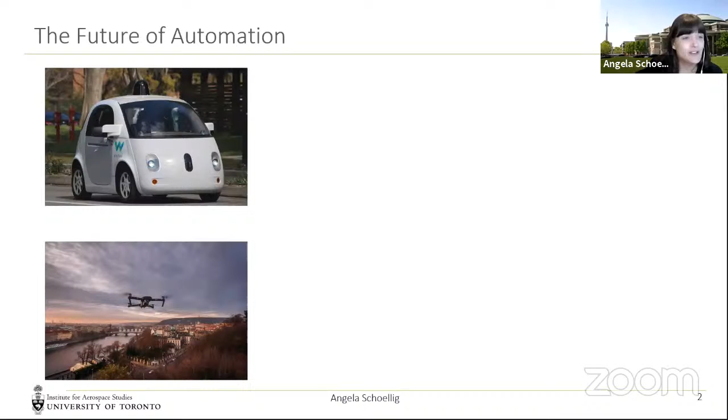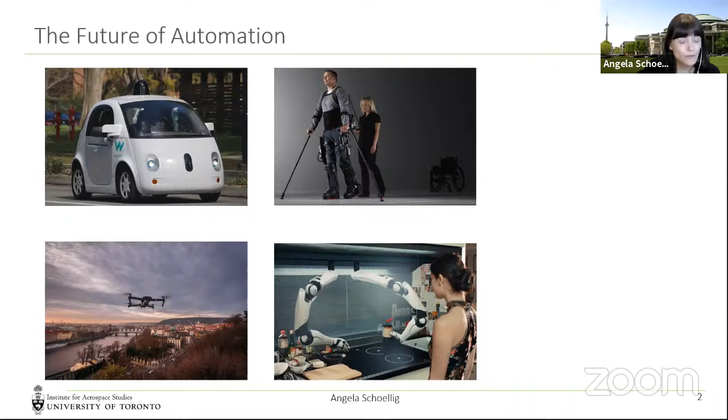So we envision a future where robots navigate on our roads and in our skies, where they support us in our daily tasks, such as in the kitchen, or supporting handicapped people to walk. And we also envision robots to collaborate with us at the workplace.

What all these examples have in common is that there are large prior uncertainties that are very difficult to predict ahead of time. On the road, that could mean the weather conditions, or in the sky, that can mean different wind conditions. In collaborative tasks with humans, that may mean different preferences and characteristics of different people. But nevertheless, the robot has to actively make decisions, and we expect safe and high performance behavior.

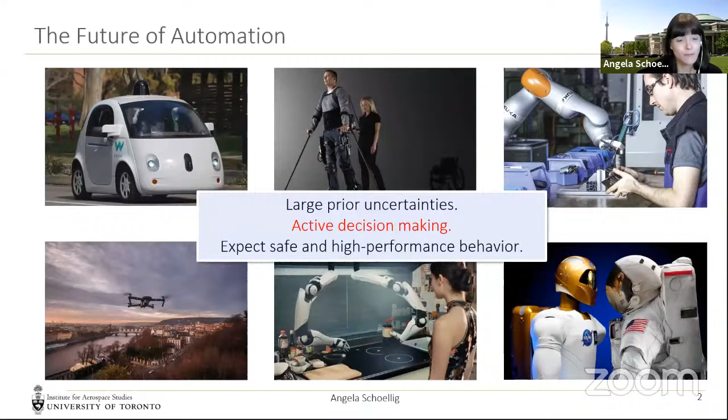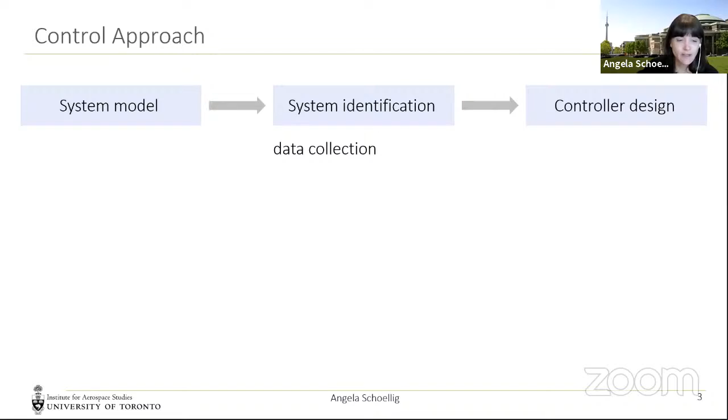Typically, how such a problem of decision making was solved by the controls community is in the following way. We would establish a system model, usually a differential equation that describes the motion of the robot in the given environment. Then we would do some system identification, which may involve some data collection, identifying certain inertia parameters of the robot. And once we have this full model, then we would design a controller that makes decisions at every moment in time. This works really well in controlled environments, such as these robots on the assembly line.

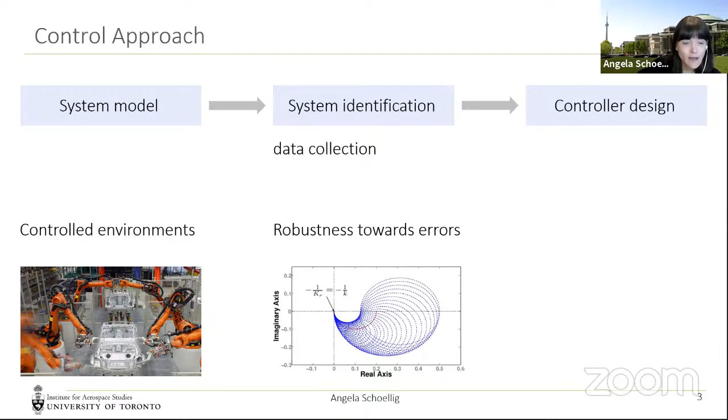We can also study how robust this approach is towards model errors, or errors in the environment that we didn't consider, and up to which point it works and when it doesn't. And we can incorporate safety constraints in formulations such as model predictive control. So we can explicitly say the robot needs to stay on the road, and we want to apply actions to the robot that guarantee the robot stays on the road. These guarantees are satisfied under the assumption that our model is correct.

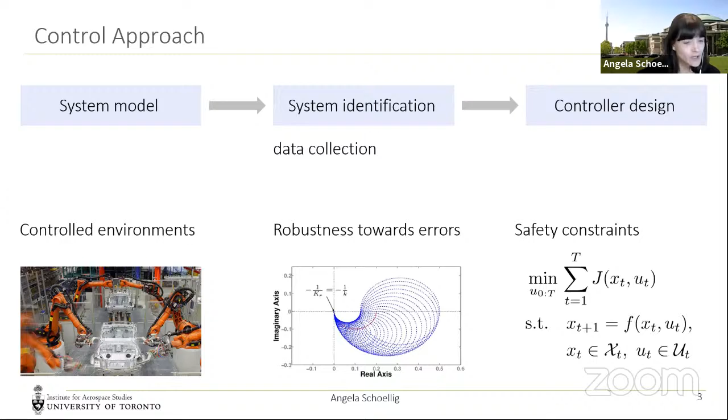So the advantages of this approach are: we have models that really describe the behavior, we can use these models for feedback, we can guarantee safety, and we can study the worst case scenario—up to which point does our controller work, up to which point of model error. But what it doesn't consider is that the worst case behavior is not always the best.

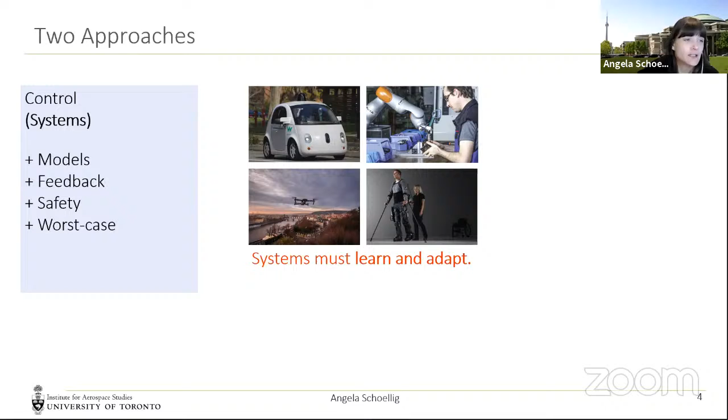So if I have a robot that should drive on the road, and I have various road conditions, the best thing a standard control approach could do is try to model this, try to model the full range of possible road conditions, and then design one controller that guarantees safe behavior for the robot. Overall, learning and incorporating data is not really considered. Everything relies on a priori knowledge.

So a priori, if I would specify the different road conditions that a robot could experience, and then based on that try to find a controller that makes safe decisions despite a variety of road conditions I could experience—there are, of course, adaptive controllers in the controls community, but generally the controls community is not good at leveraging historic data and learning, possibly even offline, from historic data and improving the system.

So the performance here is usually limited by the system understanding. Typically this means either I have model errors, or I'm very conservative because I assume I can experience a large range of different conditions, for example different road conditions. And then to find a controller that works for all of them, the controller is quite conservative—so I would basically drive as if it's winter even on a summer day, just because that's the safest I can do overall.

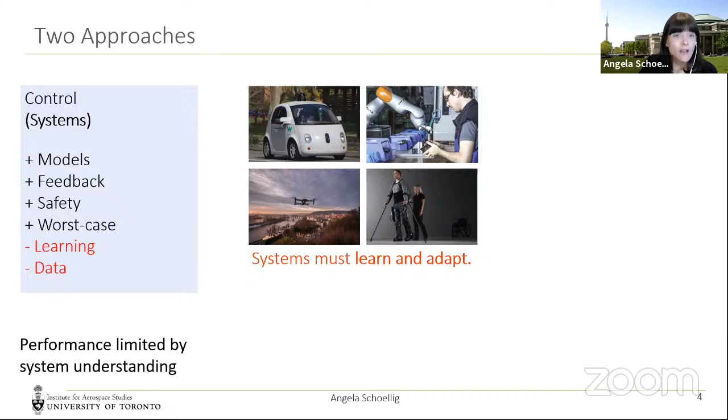Then there's the field of reinforcement learning and machine learning. Typically, I just try to broadly categorize, so don't be offended if you do reinforcement learning with models. Typically, reinforcement learning would not use a system model, completely rely on data samples, and then optimize the controller through exploring actions in the real world.

So it looks like this: I have a learner or controller. It applies actions to the robot. It observes the state and also the reward, which is related to the performance on a given task. And then it optimizes the actions over time, learning control actions based on the state.

So what is good about this? It learns relevant data for a specific task, which is defined through the reward. The performance is typically in expectation, so it does not compare to the robust control approach, where it tries to find a controller that works for any possible condition, for example any possible road condition. Usually performance here is defined in terms of expectation, at least in the more traditional works.

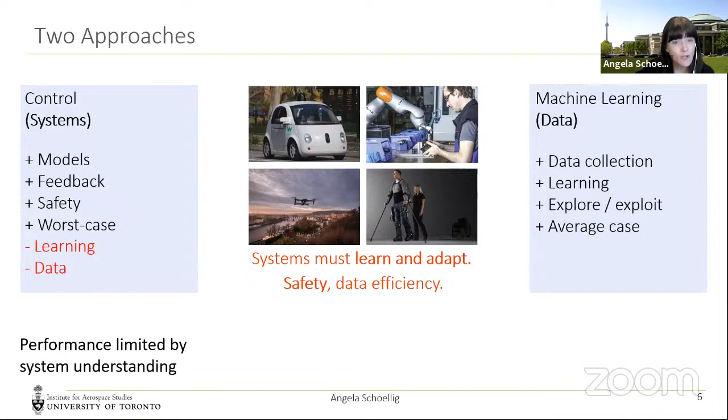That's why a lot of the examples are in simulation or simple robot cases. So it does not guarantee safety and doesn't make any kind of guarantees for the worst case. Here the safety is kind of limited by the lack of overall understanding of how reinforcement learning works.

So the idea is, can we combine the two things? Can we combine models and data to achieve systems that learn and adapt, but at the same time are safe and data efficient?

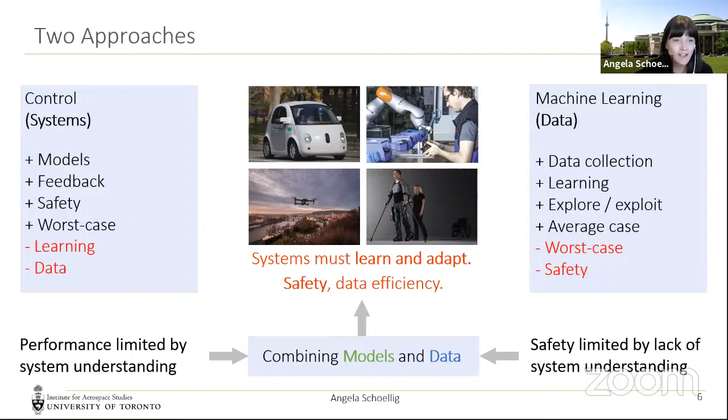To aim for these applications in the pictures, where robots directly interact with people, where we don't want to show a robot 10,000 times what to do in our kitchen till it knows it. So data efficiency is important, and safety.

So what we've done in our research is to achieve performance and safety for robotics applications with prior uncertainties by combining machine learning, which is really the science of data and inference, with control theory. Control theory for a long time has studied feedback and automation, and has come up with concepts that describe the performance of these closed loop systems that make decisions, and then the decision affects the next state, and that state affects the next decision.

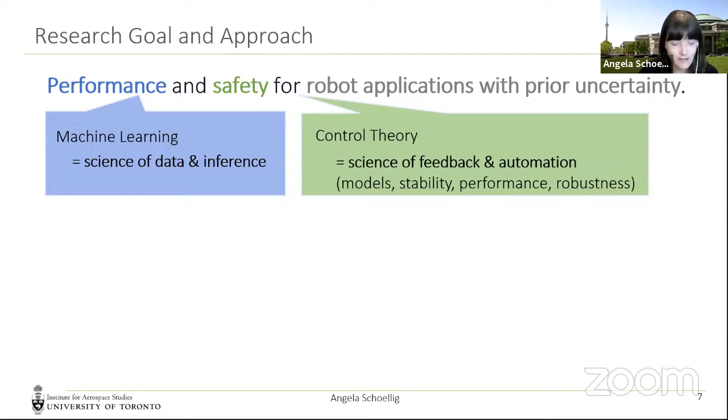So we have worked in my lab with lots of real robots, and that also motivates some of the approaches that we have been developing. Here you just see a range of robots, going from different flying platforms to self-driving vehicles, and more recently these kind of mobile manipulation platforms that could be used in home environments, but also warehouses.

A particular focus of our research was on online learning. How can we learn, can the robot improve as it moves in the environment? And yeah, real robot experiments.

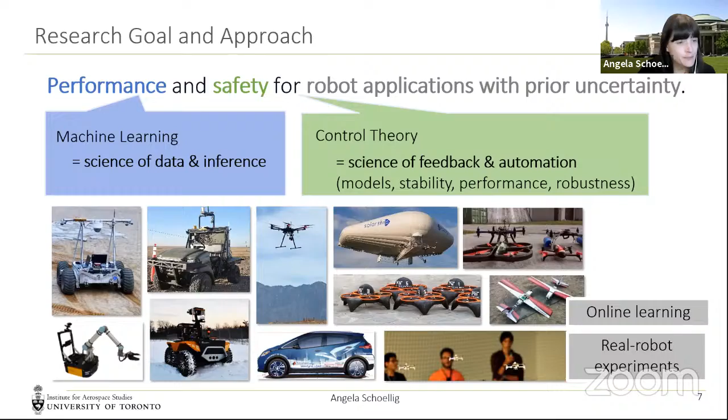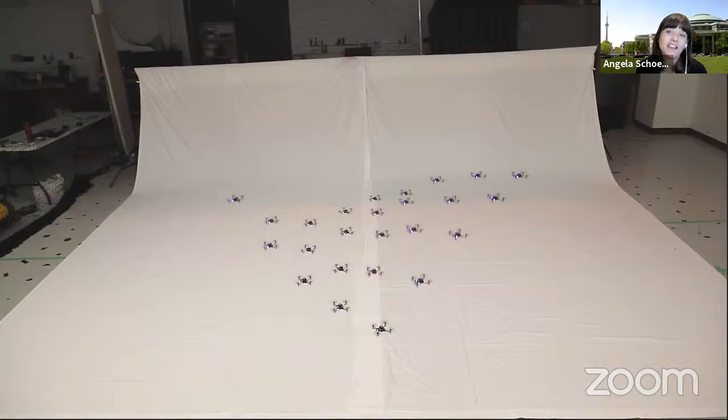So when you come to our lab, you actually see robots moving all the time, even now, despite the pandemic. So this video just summarizes, gives you a quick glimpse into the type of robots we work with and how they look. This is a swarm of robots, and here we need obviously accurate motion.

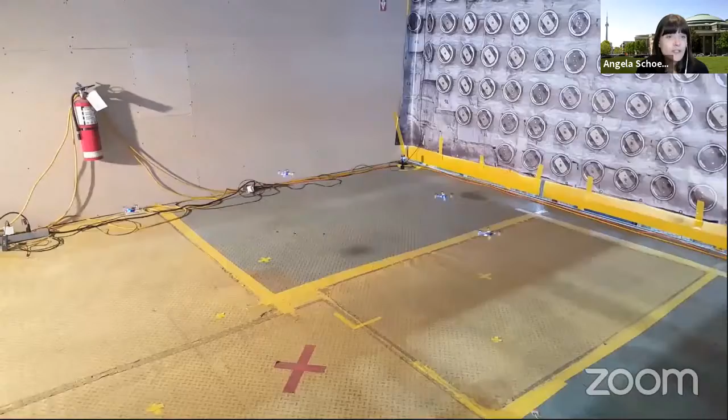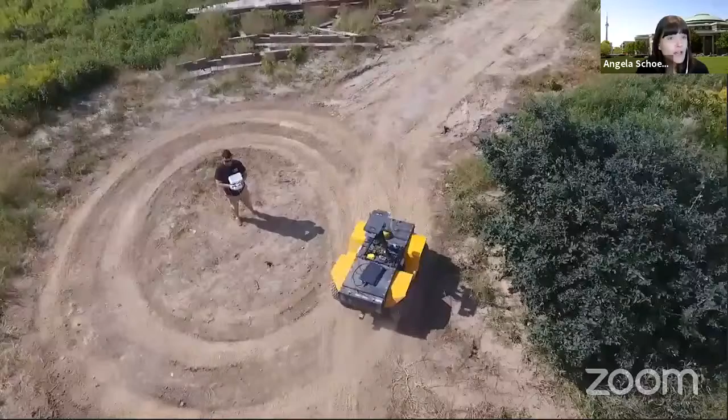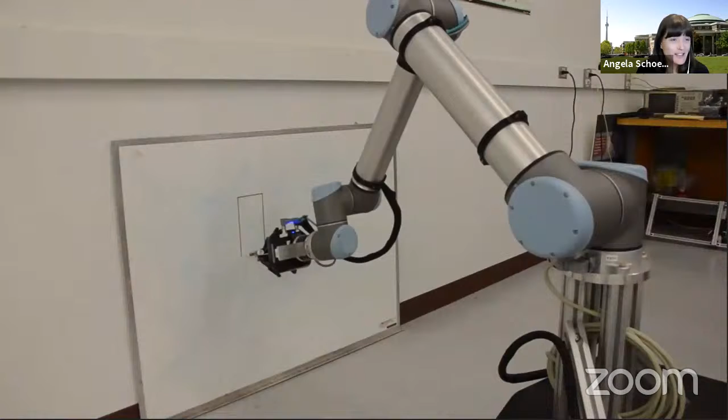This is an off-road vehicle that we have been using for some of our research. And for the last 3 years, we have been participating in a self-driving car competition sponsored by General Motors, where things have to work at competition time and day. And here you see the mobile manipulator.

So hopefully this gives you an idea where we are coming from, and which type of systems we want to work with and improve over time.

And this I'd like to briefly show. This is kind of the bigger picture of how I map our research, but also, I guess, generally the progress in robotics. On the one hand, on this vertical axis, we aim to build robots that can do more and more complex tasks. You know, industrial robots can do single, very predefined tasks, but eventually we want to go to interactive human-centered tasks. So the task complexity plays a role, but also the complexity of the system and the operating conditions here on the x-axis.

A system is less complex if we have sufficient prior information to control it, so we don't even need learning. And if the environment is partially unknown and changing, that makes it more and more complicated. So I can put some examples here, from industrial robots to self-driving to your home robot.

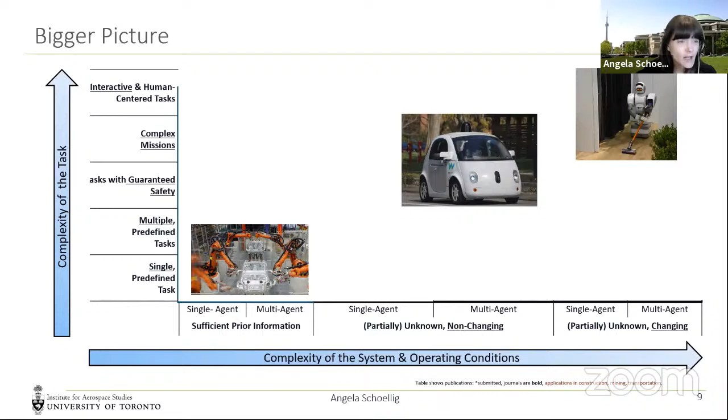So the first part, when we have sufficient prior information, we can use model-based planning and control, and we don't need any learning because we have all the prior models that we need to do this task.

Just because I assume that there are multiple people here that have more machine learning background, I want to give you the quick summary of control theory. Feedback control is something that was studied since the 1870s.

So since the first machines were developed. And the idea is really that you have a robot, you measure certain quantities, and you feed them back into the controller. The controller has also access to the desired reference signal, and this controller computes the input to the system, or to the robot. And ideally, the output follows your desired reference signal.

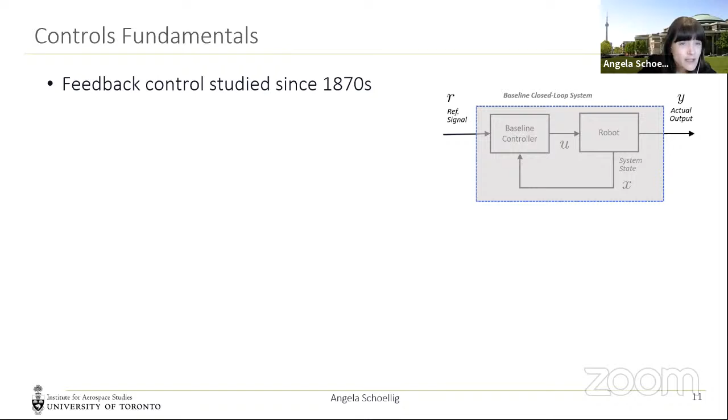So that's kind of a baseline control loop, and the controller is usually designed based on knowledge about the system. This kind of control theory focuses on dynamic systems and continuous states and actions. It assumes an accurate class of models, and then it can give you closed loop performance guarantees.

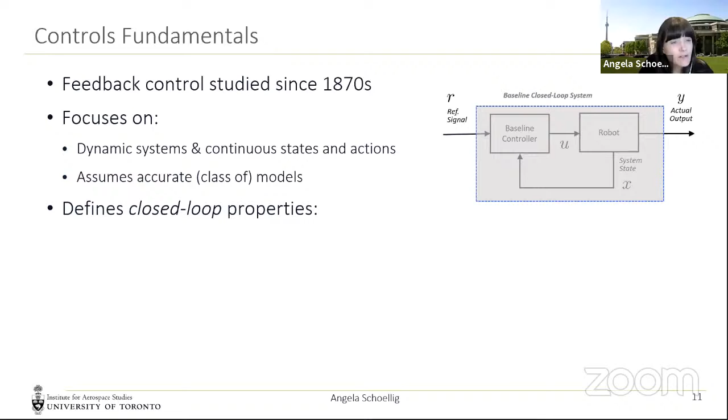And that's, I think, something that can be very interesting for machine learning researchers as you continue using your machine learning techniques in robotic systems. They're kind of in a closed loop. And so control theory has always studied stability.

So if I have a bounded input, can I always guarantee a bounded output? So for a flying vehicle, this means, will I stay in the air and not crash, despite maybe some perception errors, some controller errors? Can I be stable?

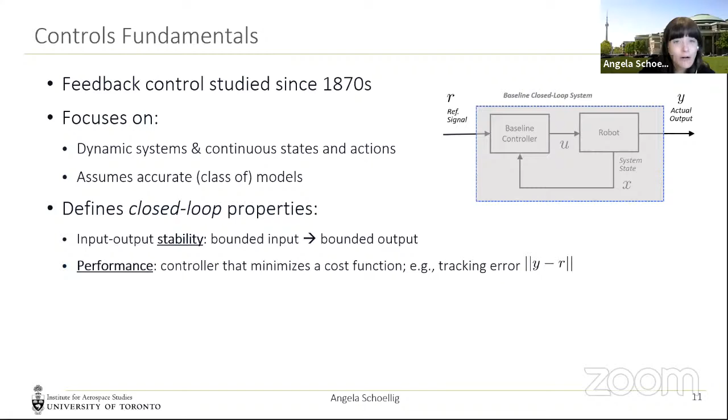They have also looked at the performance of this closed loop control system, like, for example, how close is my output tracking my reference signal? And they can derive formal results for this.

And in control theory, robustness is a big topic. So robustness generally means stability and performance in the presence of bounded modeling errors. And so it basically gives you worst case guarantees. I bound my errors in my model, or generally my errors in the closed loop system. And I say, if I have these bounded errors, my system still performs at a reasonable level of performance, and it doesn't become unstable. So the car doesn't drive off the road, the flying vehicle doesn't crash.

And then finally, they can also give formal guarantees for constraint satisfaction under the assumption that a model class is known, and under this assumption, for example, that these errors that we have in the closed loop are bounded.

So what I want to say with this slide is, in control theory, the closed loop properties and characteristics have been studied, but under very simplifying assumptions usually. The biggest simplifying assumption is that we have accurate models and accurate bounds for the errors. But then, they could study and guarantee things like constraint satisfaction, robustness, and certain levels of performance.

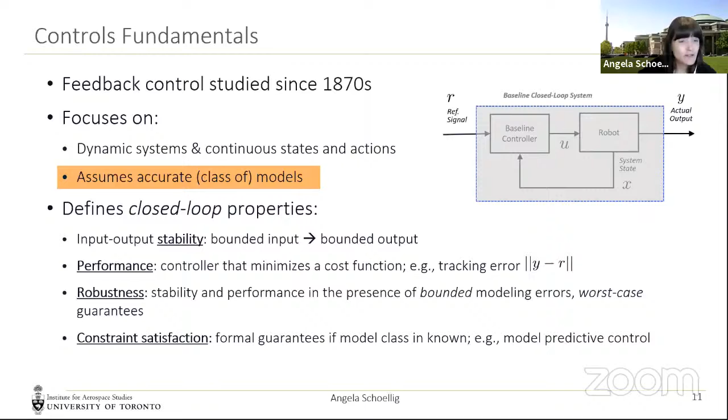So how do we go from the traditional control theory to these more interesting application areas? My story, my promise, is that we need machine learning because we have limited information, or we don't have all the information ahead of time. So in the talk, I want to show you some of the things we have been doing to combine control theory and machine learning.

I want to show you how we started with a single robot learning a single task. We allowed it a training phase with some unknown but static conditions, and how we extended this to a multi-robot framework learning multiple tasks. The robots continuously improve as they operate in the real world, and they can deal with changing conditions.

Let's see. The first step was a single task, and we allow a training phase. The example you can envision is flying a slalom with a drone. That was the application scenario that really motivated me to get into learning in the first place. We wanted to race the slalom with a flying vehicle.

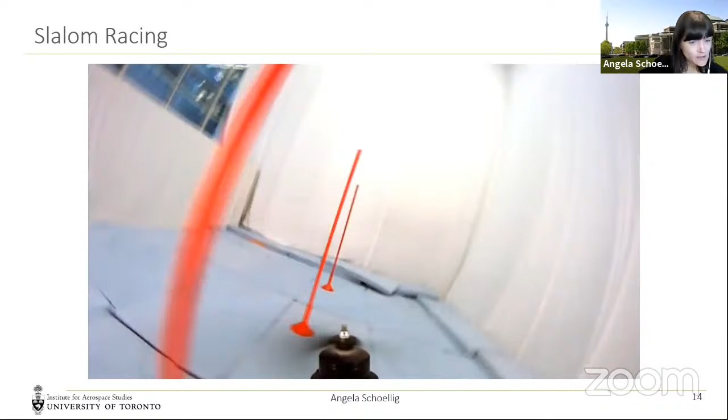So this was a single task, and we allowed it to learn through practice. Similarly, if you would change your career and suddenly do car racing, you would practice a lot on the same course to optimize your strategy. So what we did here is we have this baseline underlying control system.

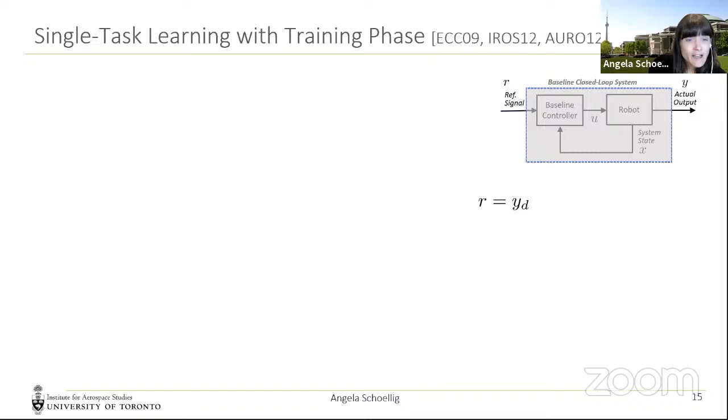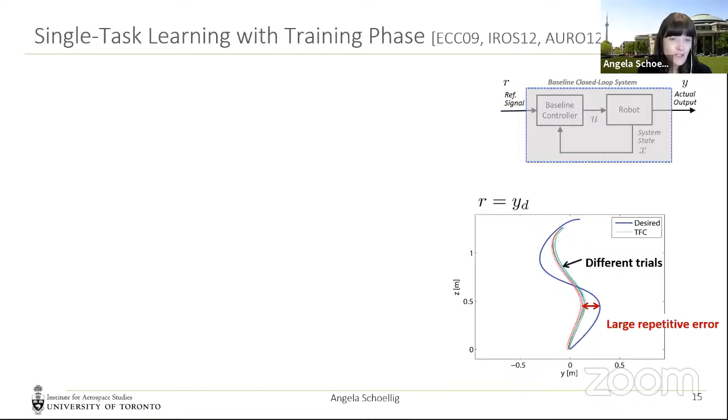So whenever the robot did something, it did it consistently wrong. That was saying, okay, it's a repetitive error or something, you should be able to compensate for this. This was really triggered by model errors in our system. And so what we did is...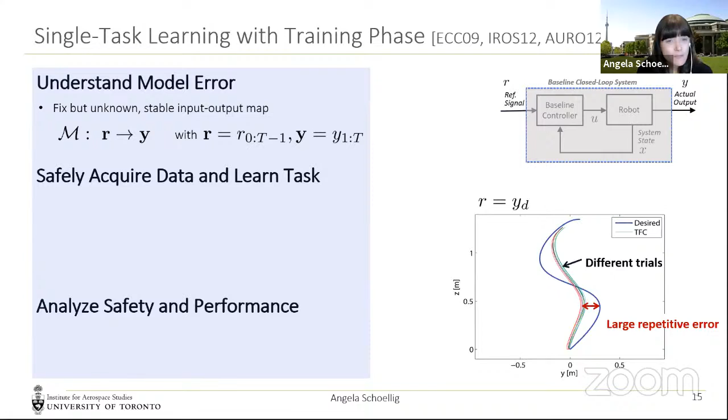We tried to understand the model error by looking at these trajectories, how my reference signal, which was the blue line, maps to my output, which are these colored lines. And then we use that to compensate the reference signal, to change it such that the mapping from my input to my output is actually a unity map, so my desired output on the left and my actual output are the same.

And for that, we use basically a policy gradient method. So we iteratively changed the reference signal in a way that gets us closer to the output that we really want to see. You don't have to see all the details, but basically we take the old reference signal from the previous iteration, and then we look at the tracking error that we had.

And then we use an inverse model, which was just our approximate model - this was not learned. This tells us, if I'm a bit too far to the left of the trajectory, how do I have to change my reference signal to get it a bit closer to the reference trajectory? This just has to be correct to first order, such that I understand how a change in the input makes a change in the output.

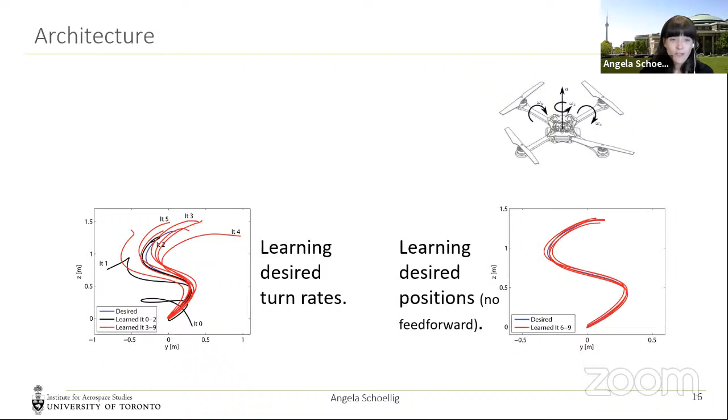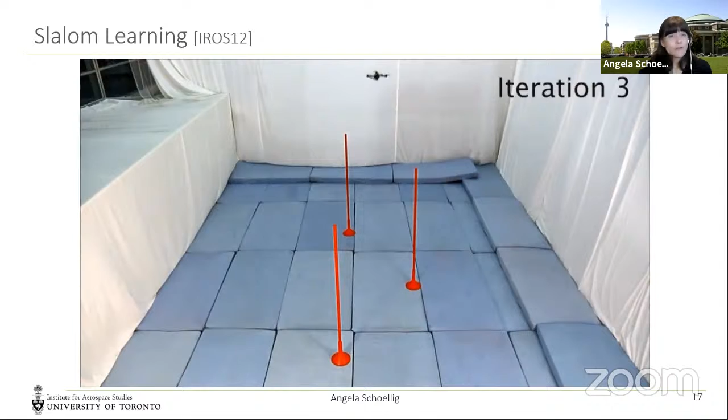This architecture allowed us to practice above the poles, because we couldn't guarantee that we don't fly into the poles during the learning. But once we saw we can make it, which usually took 3, 4, 5 iterations, we can actually demonstrate the behavior.

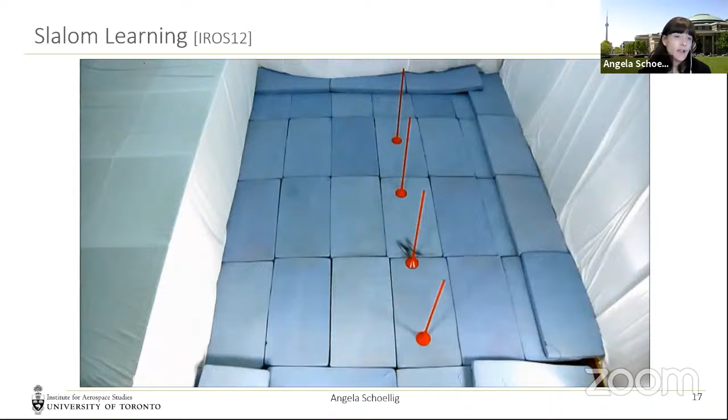And here you see the learned result for a different configuration, which we learned from scratch.

So this was learning a single task through practicing the single task, allowing a training phase. Now, how can we extend this to multiple tasks? In the previous example, a new slalom configuration would require us to relearn again.

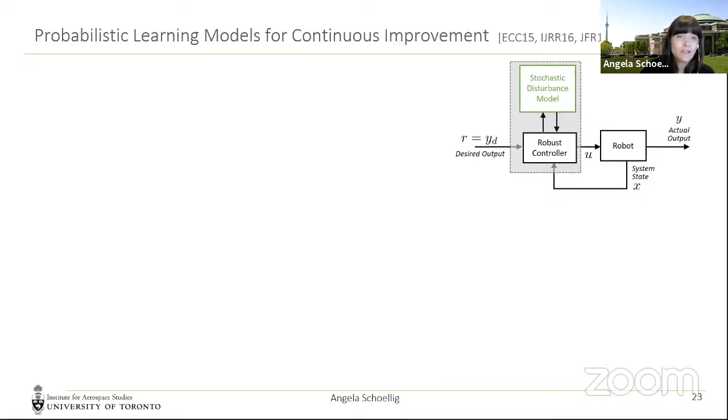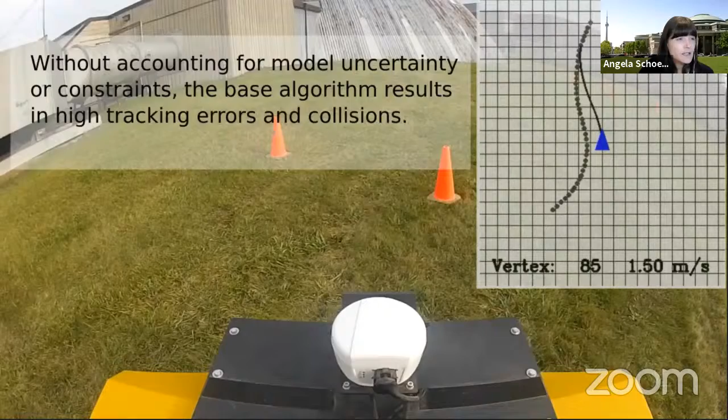Here's a video that motivates this. We drive this robot, and we are not accounting for model uncertainty or constraints in this case - we just tell the robot to follow this path. We carefully selected this path to show the problems with model-based approaches, but here you collide with these pylons.

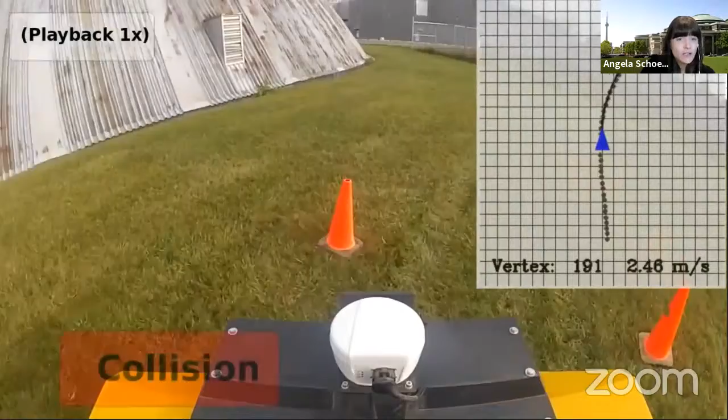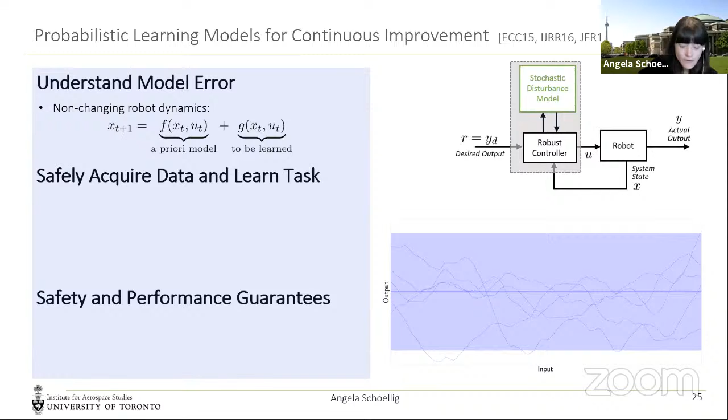So how do we do this? The disturbance model we use is additive. We have an a priori understanding of how, for example, this ground robot moves, but there's something we don't model - the detailed dynamics, the interaction of the wheels with the ground, many things that influence behavior - and we just say it's additive. That's a choice, just the easiest to do. Then we say this is something we don't know ahead of time, this G, and we model it with a Gaussian process model.

If you look here at the bottom right, it could look like this - this function we don't know. Initially, we just say this function lies anywhere in this blue shaded region. We want to find a controller that works no matter what G is, as long as it lies in this blue shaded region. So we make this assumption that the function lies with high probability in this blue shaded region - that's a prior assumption.

But then we collect data as we drive and learn more about the function. If we get two data points, we've already narrowed down where this function could lie - any of these thin blue lines could be a possible representation of G. What's also important is why we can shrink this envelope even between two data points - because we made some continuity assumptions. We assume that G has at least a maximum rate of change.

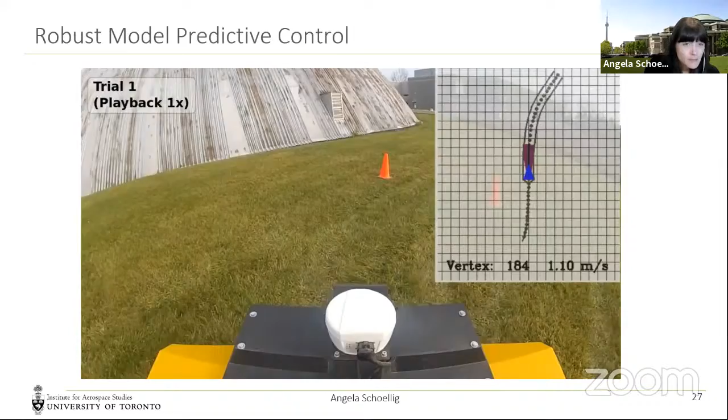So here you see an example. We drive the same path as I showed you before. This is the first trial, and we made the initial uncertainty high to be safe, so we drive pretty slowly. But then as we gather more data, our knowledge about the system becomes more clear, and we can drive faster.

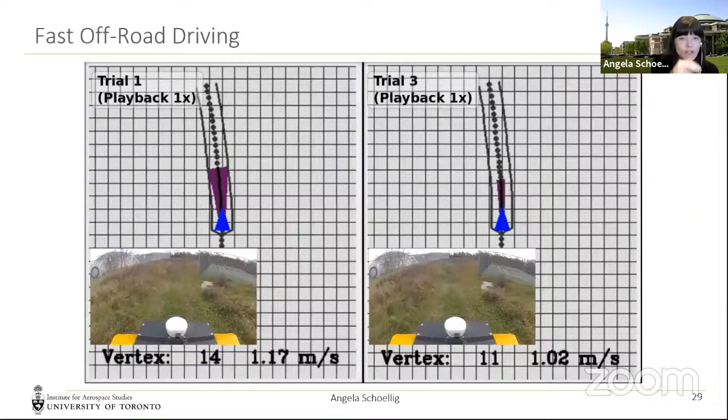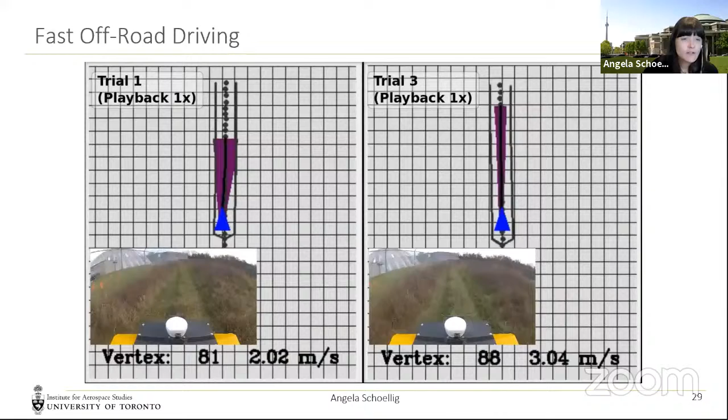Here you see trial 1 and trial 3 on an off-road path that goes along fences and trees. On the left is the first time we drive it, and on the right, the third time. Especially on straight sections of the path, we go quite fast, 3 meters per second, much faster than during the first trial. We finish this section of the path faster than in the first trial.

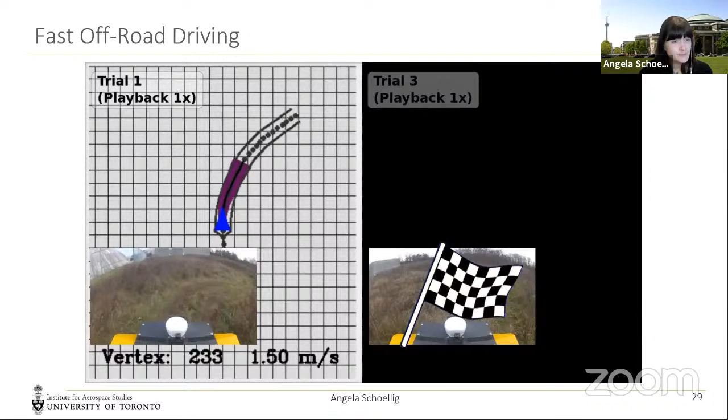We have done a number of recent works in this direction, using the probabilistic formulation and doing continuous improvement. If you're interested, I'm happy to touch base later and discuss this further. For example, we have combined it with differential flatness, Gaussian processes with differentially flat systems, which also seems promising.

Finally, how can we get from a single robot and static conditions to multi-robot transfer learning and changing conditions? For both of these, our answer so far is the same: we need somehow a combination of fast adaptation and long-term learning. I think this is just a first approach.

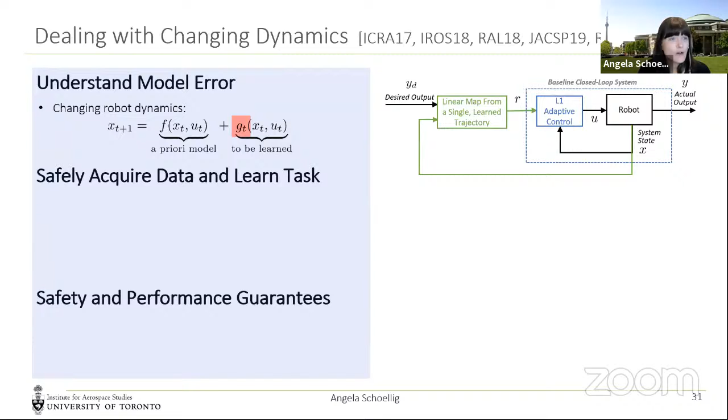We're still working on this, have some ongoing work. But now, compared to the previous example I showed you, we assume this function can change, either with time or because we change the robot. So the architecture we use has a very fast adaptation that tries to compensate for these changes over time, and then an outer inverse map that looks very similar to the results I showed you with the hand-drawn trajectories.

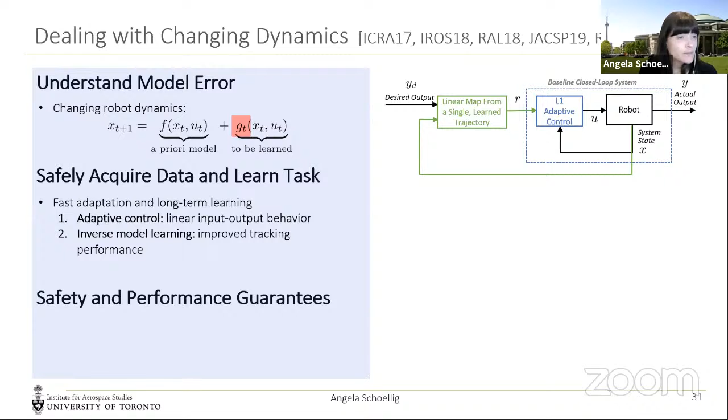What this adaptive control does is make this gray box, or baseline box, the dashed line box, try to behave like a reference model. It tries to guarantee, and there are actually formal guarantees under some assumptions, how closely this dashed box follows a certain reference behavior. Then we do inverse model learning, similar to the hand-drawn trajectories. The nice thing is that L1 adaptive control under assumptions can give you some guarantees. I think that's really interesting to study because they give you guarantees on closed loop systems.

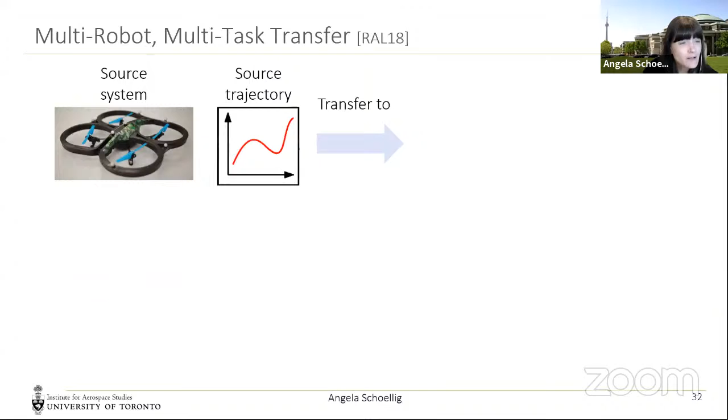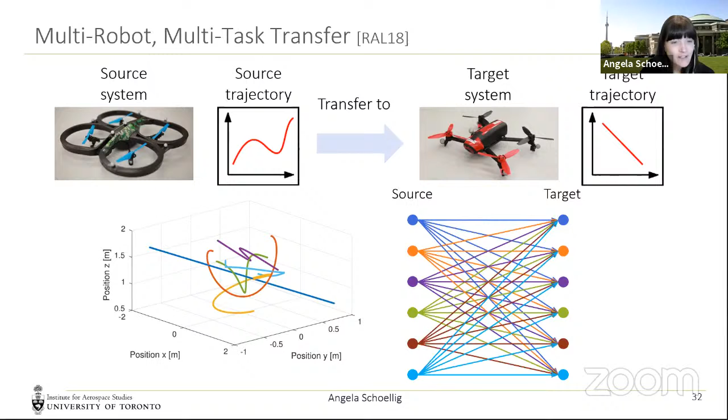I want to show you one work where we have one robot that learns one trajectory, and then we try a different trajectory. These are the different trajectories, and the results I show use one source trajectory from the source robot, then test it on the target robot on 6 different trajectories. I see how well my knowledge from the source robot can be used to do these different 6 trajectories, and then I do this for all combinations.

So we can get 74% error reduction with transfer learning, and the target robot doesn't have to learn at all on its own. So you could use that if the target robot is very expensive to operate. You could train on some similar other robot.

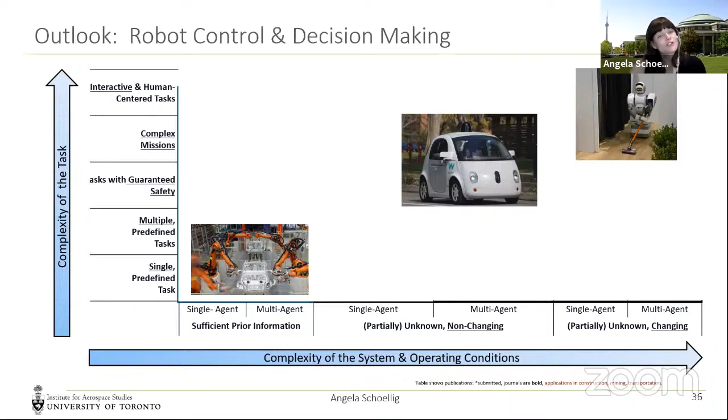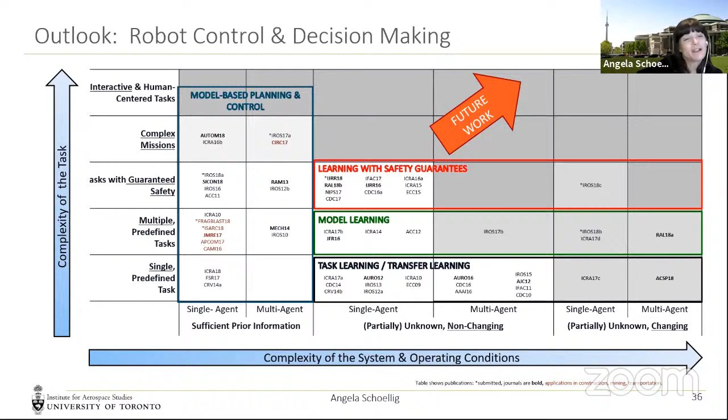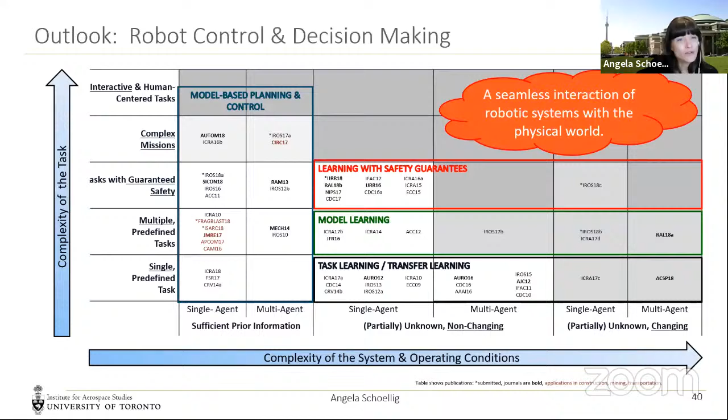So going back to the big picture, our work has kind of fallen into these categories. You can partially categorize them, try to fill the gap, but you see all the gray boxes - there are no publications from my group or possibly from some others. But really, I think it's really important to think both about the complexity of the system and the task to eventually go to the top right corner, which would enable a more seamless interaction between robotic systems and the physical world.

So what is next? Some more recent work is mostly on dynamic environments, more complex missions and collective learning, and more human-robot collaborative tasks. I want to just show you two brief videos of what we have done more recently.

We started working more with this mobile manipulator. Here you see a bit of interaction where the student, Adam in this case, pulls the robot, and it on its own avoids these obstacles by following him.

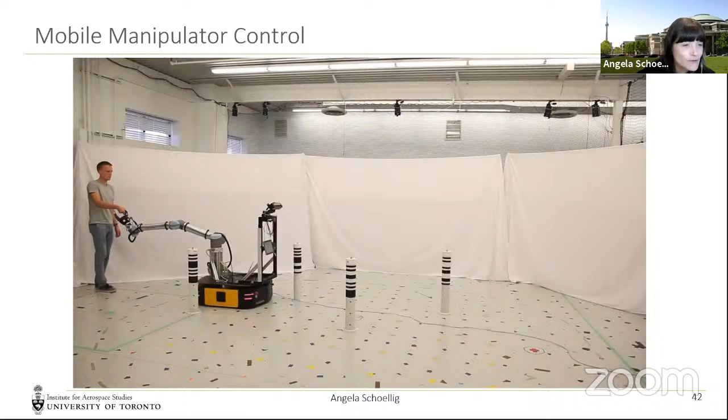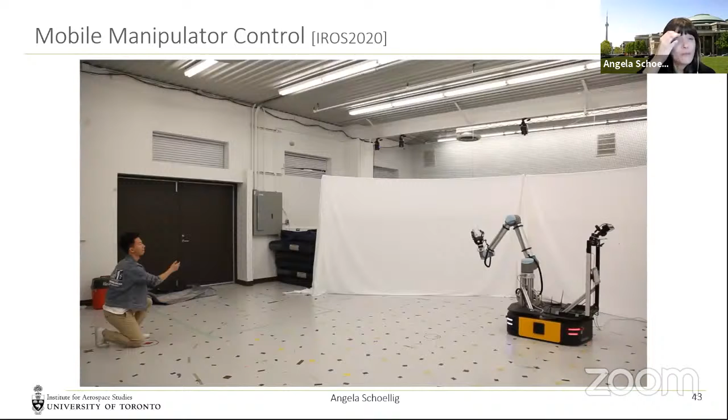Here we started really exploring the dynamic capabilities of this robot by catching balls. The video for our IROS paper shows more variety of throwing, where we really have to be very accurate in our motion, both in terms of accuracy in space and also in terms of timing. Here we also use some learning, the inverse dynamics learning component, to make this catching work.

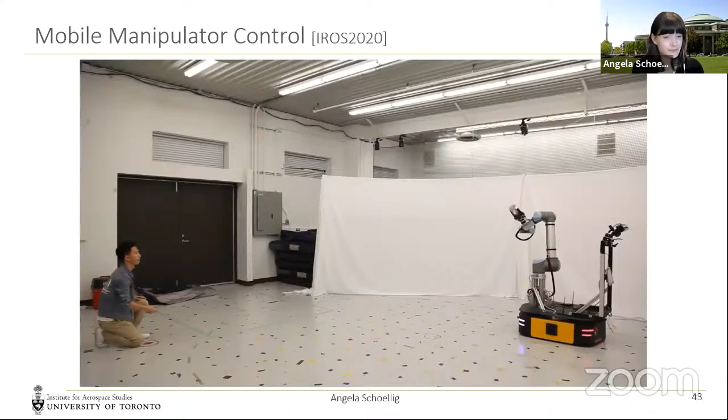So to conclude, I think there's really a broad field in robotics to guarantee performance and safety for applications with prior uncertainty. I think all roboticists here on the call aim for expanding the operation envelope of robots and enabling them to deal with more complex and changing environments. So I guess the one take-home message is: in order to enable these new applications, these systems must learn and adapt offline or online or both. But we also need safety and data efficiency if we talk about robotics.

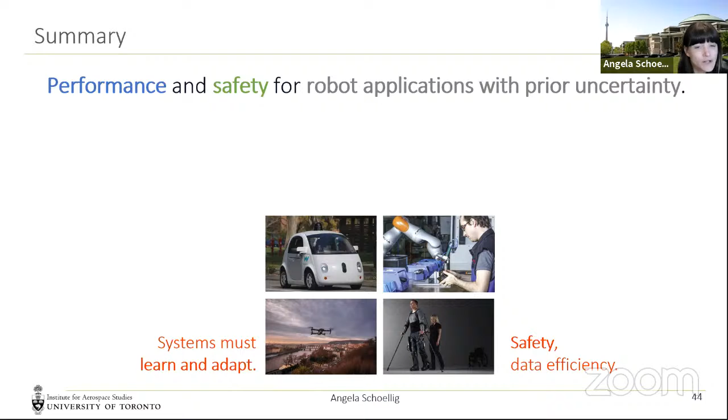A lot of what I've been doing with my team is combining machine learning with control theory, and mostly control theory is used to understand, characterize, and prove things about the closed-loop behavior of the full system, including the learning component. Finally, this is of course due to really great students who work with me, and some of my main collaborators.

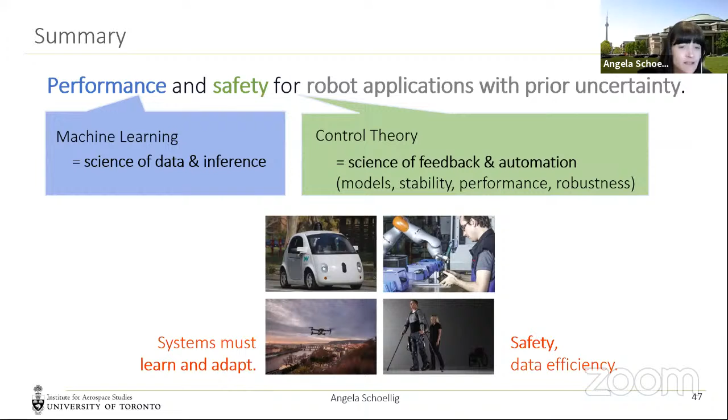I have a bunch of questions, but maybe we can field questions from the panel, or I'll dive in. Sure, go ahead. I'm assuming someone will push in the chat if they have a question, and we can get to them. That was a really great talk, Angela.

Thanks so much. I wanted to ask a little more about the thing you mentioned about characterizing the similarity between systems. How are you thinking about that problem? Do you think about it in terms of input-output?

Our approach so far still looks at very simplified systems. We started with linear systems and looked at how similarity is characterized between two linear input-output behaviors. This is a much broader question once you think about 3D rendering of the environment. Overall, what I've done is usually more on the decision-making and control side, but the perception side makes this all much more complicated. We did some work incorporating perception and still trying to characterize the closed loop behavior.